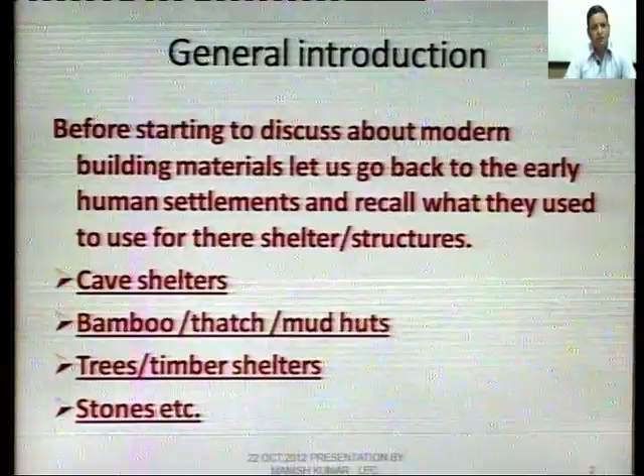So let's start. Before discussing modern building materials, let's go back to early human settlements and recall what they used for their shelters and structures. We know they used to live in caves, use bamboo and thatch for their huts, live on trees, and use stones also for their shelters.

Now think a little, and we can conclude that in those times some factors limited the use of that kind of materials. First, need — they were not in demand of high strength or long lasting structures, so they erected temporary structures since they used to move on. Second, knowledge — their knowledge was limited, so they were not able to construct huge buildings. Availability of material was also a constraint, so they used locally available materials like trees, thatch, stones, etc. And the technology available with them had very few advancements.

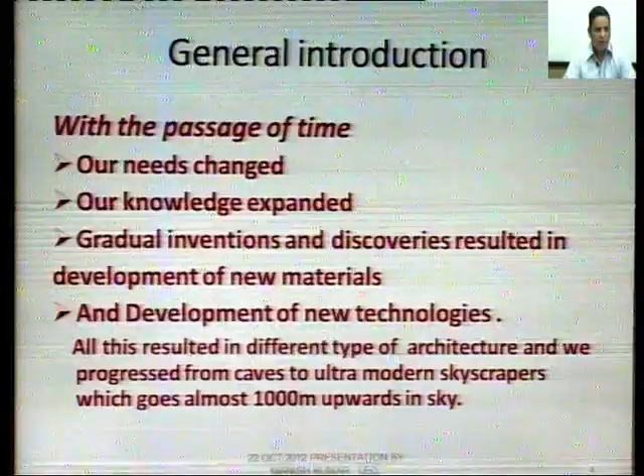With the passage of time, our needs changed, our knowledge expanded, and gradual inventions and discoveries resulted in development of new materials and new technologies. All this resulted in different types of architecture, and we progressed from caves to ultra modern skyscrapers, which go almost 1000 meters upward into the sky. And now we are planning to build on the moon and on Mars also.

So in today's lecture, we will learn about some modern building materials and some new techniques and technologies which are being used to construct ultra modern structures, buildings, skyscrapers, etc.

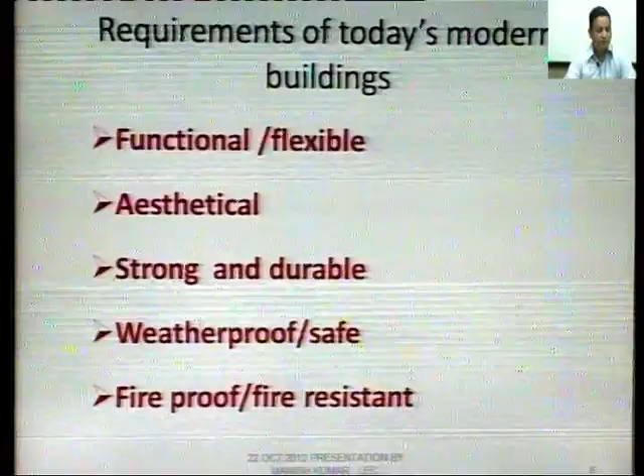First, we will discuss the requirements of modern buildings. Modern buildings should be functionally okay, flexible, aesthetically pleasing, strong and durable, weatherproof and safe, fireproof and fire resistant, earthquake resistant, economical, environment friendly, energy efficient, and if possible terrorist proof also.

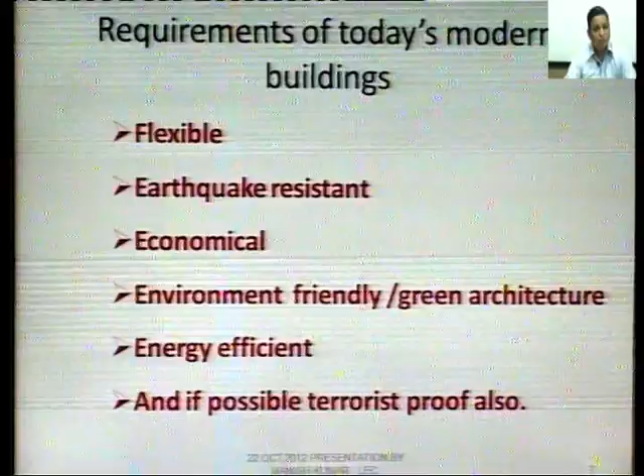First, we will start with the functional aspects. Functionality is not a problem these days, because no matter how big or small our functional requirement is, we have advanced and accurate technologies which can be successfully applied to achieve required goals in a building.

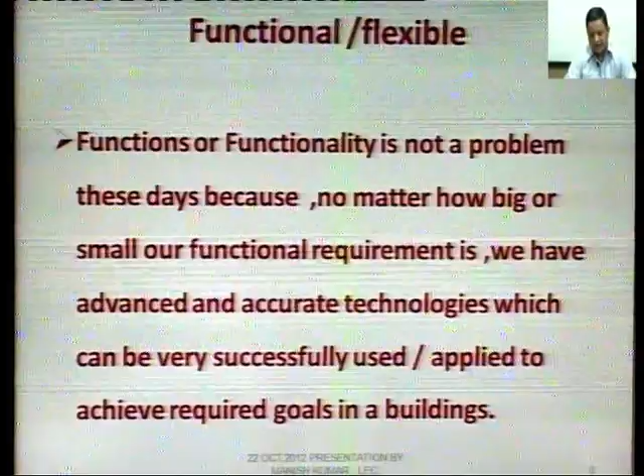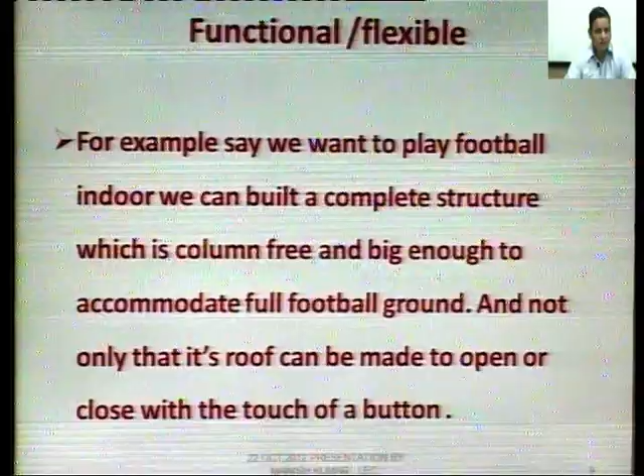For example, say we want to play football indoors — we can build a complete structure which is column free and big enough to accommodate a full football ground. And not only that, its roof can be made to open or close with the touch of a button.

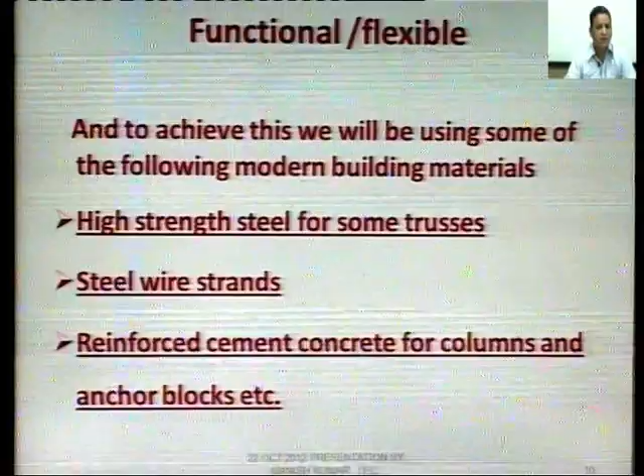To achieve this, we use some of the following modern building materials: first, high strength steel for trusses; second, high strength steel wires or strands; third, reinforced cement concrete for columns and anchorage blocks, etc.

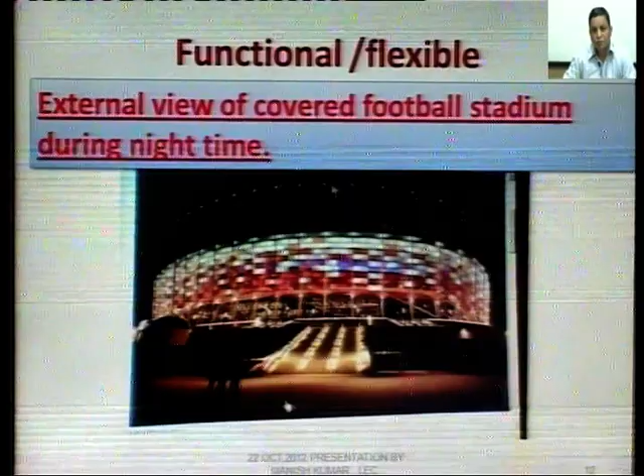Here, look at the picture. This is a view of a covered stadium whose roof is supported by huge and massive steel columns and cables. This is the external view. This is a slide of the same stadium at night, and we can see the roof supporting structure columns going high into the sky. These dots indicate the top end of the roof supporting structures.

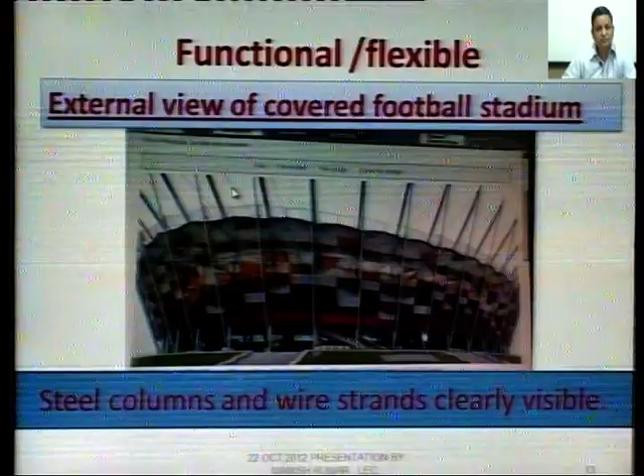This slide gives a closer view of the supporting steel columns and the cables which support the roof. This is another slide showing a covered stadium. We can see the roof is covered, and these two huge arches are supporting the roof structure.

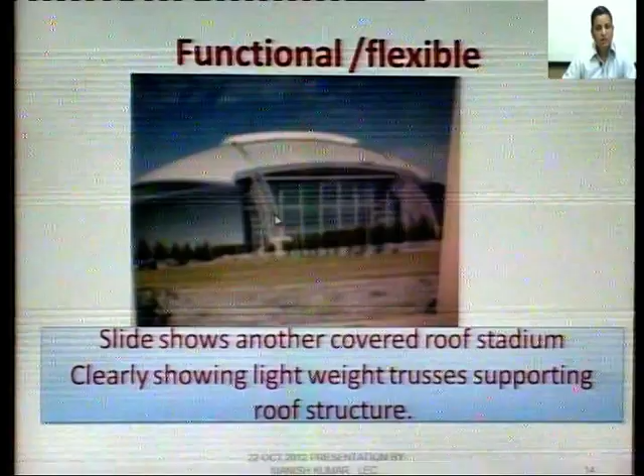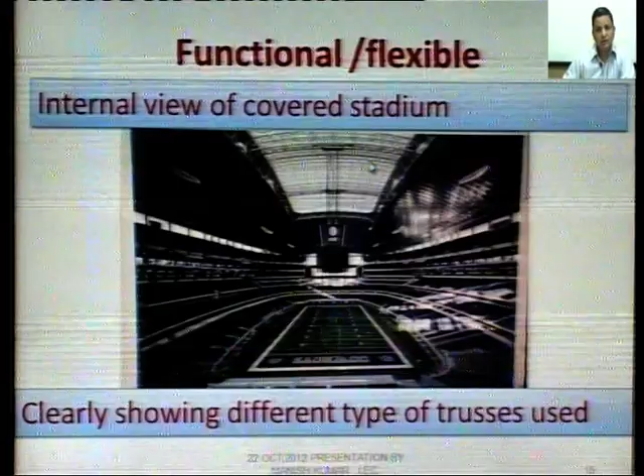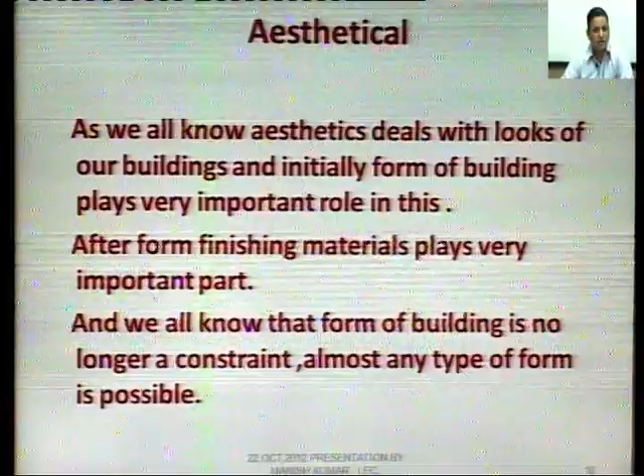The second aspect is aesthetics. Aesthetics deals with the looks of our buildings, and initially the form of the building plays a very important role. After form, finishing materials play a very important part. Form of the building is no longer a constraint — almost any type of form is possible.

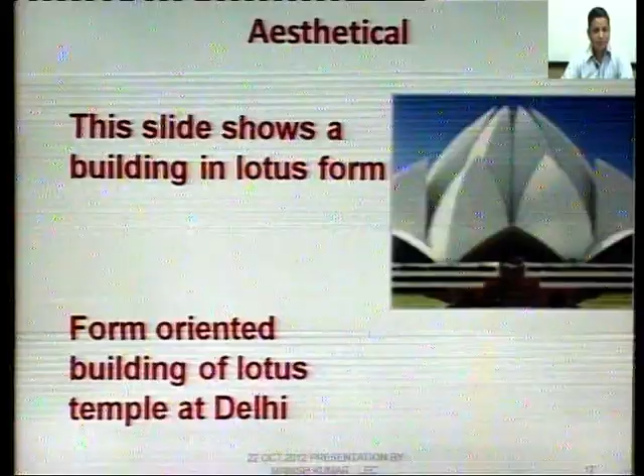This is a very good example of a form oriented building — we can see a lotus type structure. It is the very famous Lotus Temple at Delhi. This is another slide showing form oriented buildings.

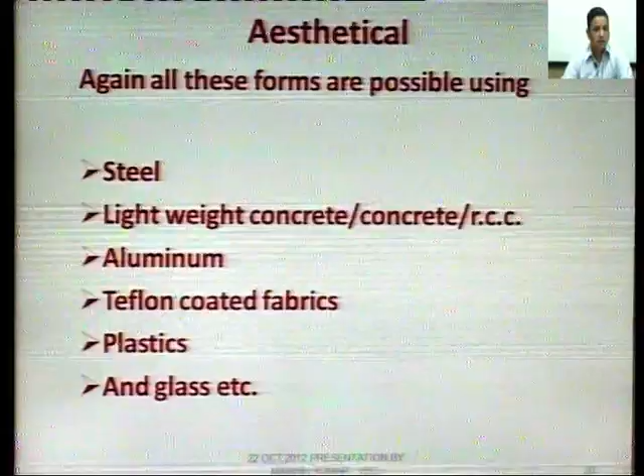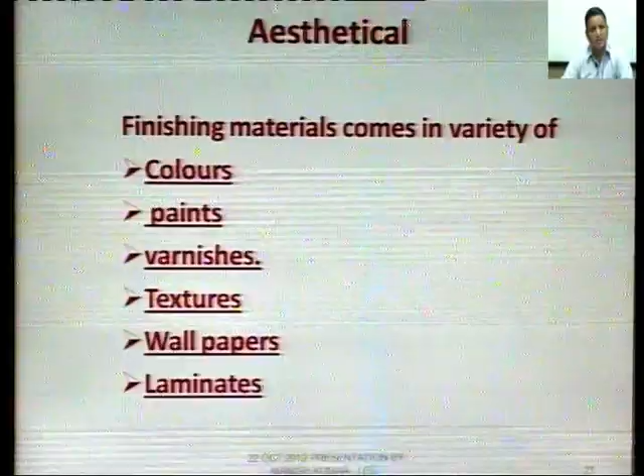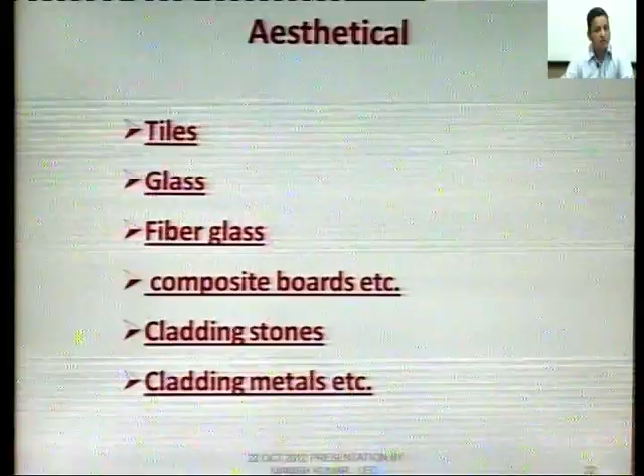Second part of the aesthetical was finishing materials. Finishing materials come in a variety of colors, paints, varnishes, textures, wallpapers, laminates, tiles, glass, fiberglass, composite boards, cladding stones, cladding metals, etc. A lot of permutation and combination of these materials can be applied to achieve the desired aesthetics.

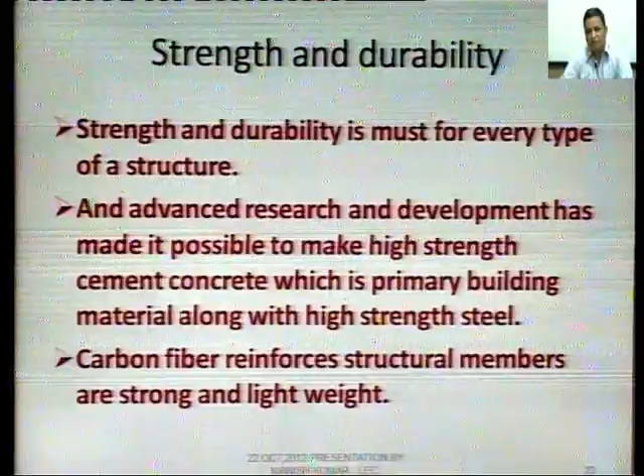The next important aspect is strength and durability. Strength and durability is a must for every type of structure, and advanced research and development has made it possible to make high strength cement concrete, which is the primary building material, along with high strength steel. Carbon fiber reinforced structural members are also stronger and lightweight.

We all know that glass is a brittle material and it breaks easily, but advanced research in this field has made it possible to manufacture glass which is strong enough even to resist bullets.

Apart from all these, admixtures are added to concrete to increase its strength. Polymers are added to mortars to enhance its binding properties. Pre-stressed concrete is also a very good example of high strength concrete, and there are two methods to do this.

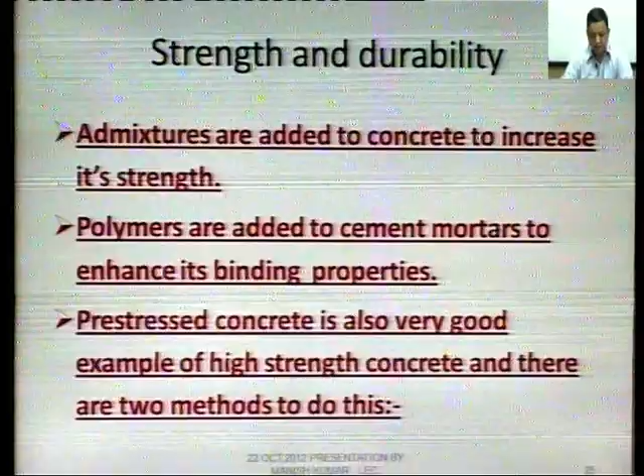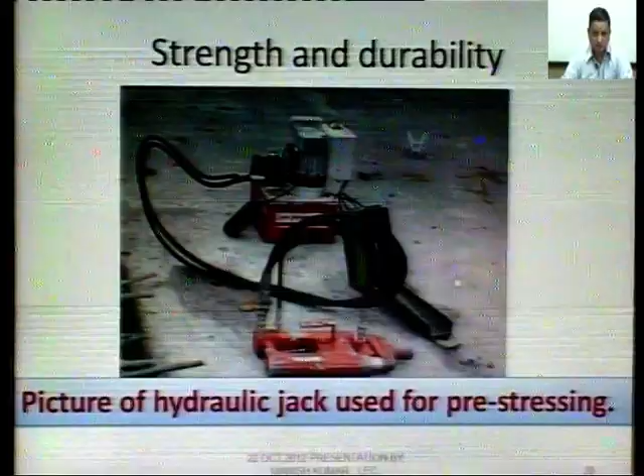This slide shows a hydraulic jack used to pre-stress steels in pre-stressing.

The first method of pre-stressing is pre-tensioning. It is a very simple method. In this method, steel is stressed before concrete is poured and allowed to set, keeping the steel in good tension. Concrete prepared by this method has much more strength and durability than ordinary reinforcement concrete.

The second method of pre-stressing is post-tensioning. In this method, steel is stressed after the concrete is poured and allowed to set, then the steel is tensioned. Concrete prepared by this method is also much stronger than ordinary reinforcement concrete.

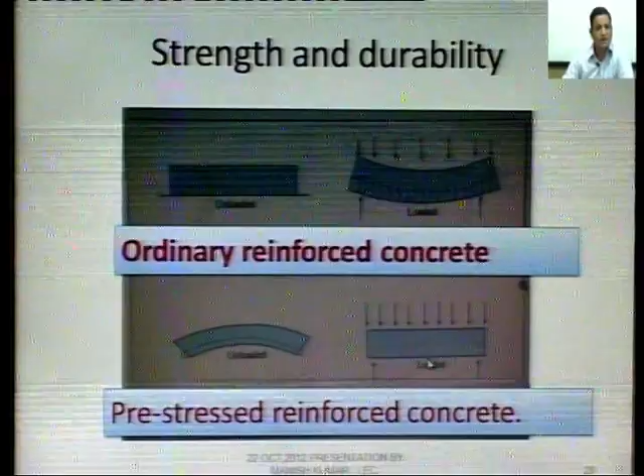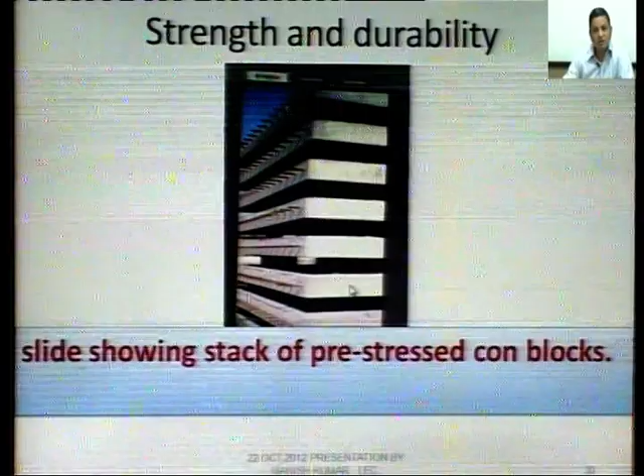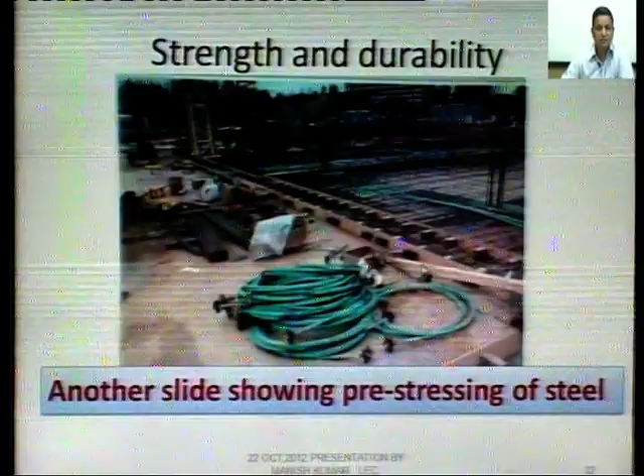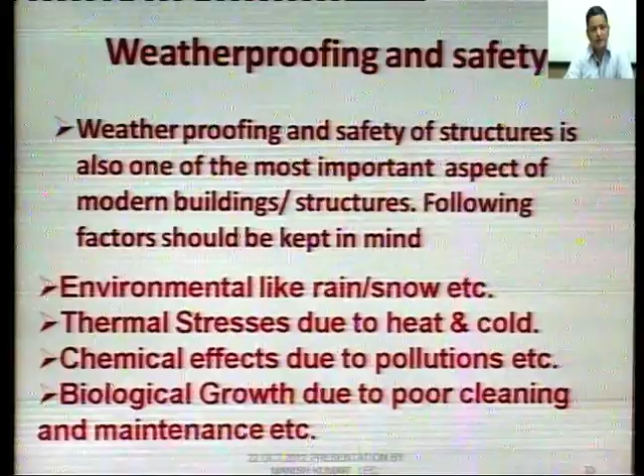And to counter all these above listed factors, we have advanced materials which can be applied and used to counter all those threats. First, anti-corrosive coatings - we can protect our structures by applying some anti-corrosive coatings. Second, adhesives and bondings - we can properly bond different structural members so that there is no leak. And if there is a leak, we have high strength repair mortars and curing compounds.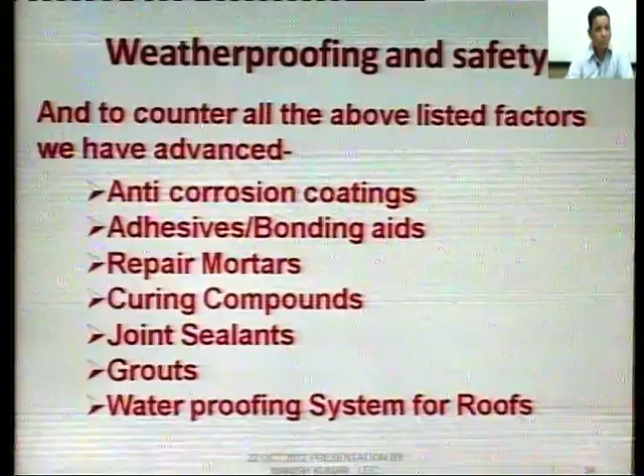We have joint sealants, we have grouts, we have waterproofing systems for roofs, and some other special materials also. Various compounds used for these are different types of epoxies, polyesters, acrylics, polysulfides, polyurethanes, and silicons, etc.

Thermal stresses due to heat and cold can be countered by good expansion and contraction joints. This is very important - our buildings expand in hot summers and contract in winters. So we must provide expansion joints in all our buildings and properly water seal them so that there is no leakage. For that we need joint sealants, grout, and there are other methods of waterproofing of joints also.

Weatherproofing and safety, expansion joints. These are provided in buildings at some regular distances.

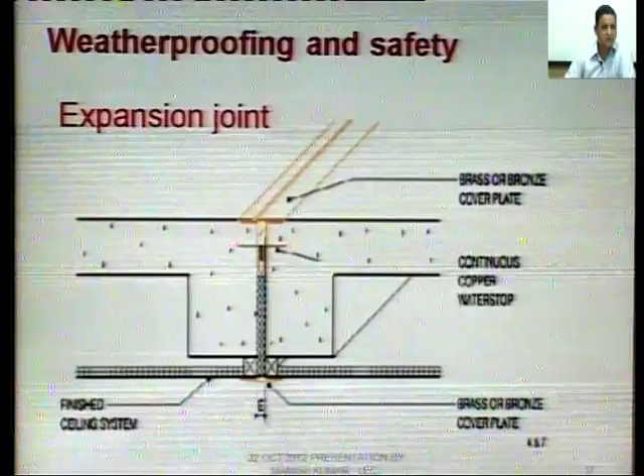This is a sketch showing two parts of the slab - this is one part of the slab, this is another part of the slab. This is the expansion gap provided between the slabs. We can see that at the top a brass or bronze cover plate is provided, and inside there is also a copper water stop. This is also this type of metal plate, and we can see that at the bottom also a brass or bronze cover plate is provided. This is a very good example of an expansion joint. This protects buildings and stops the forming of cracks.

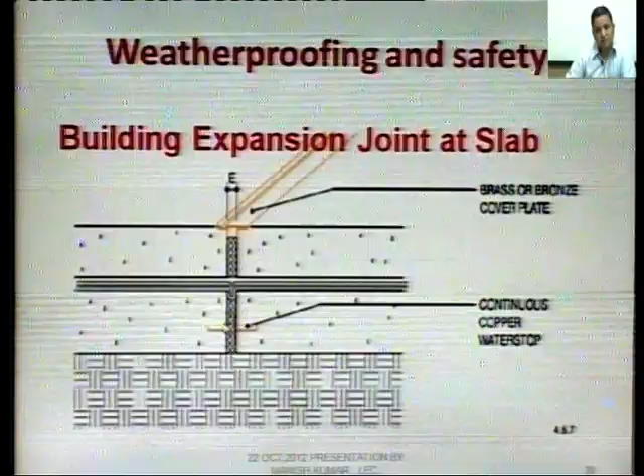Here's another example of a joint. In this joint also, at the top a brass or bronze cover plate is provided, and a continuous copper water stop is also provided here. This is also a very good expansion joint.

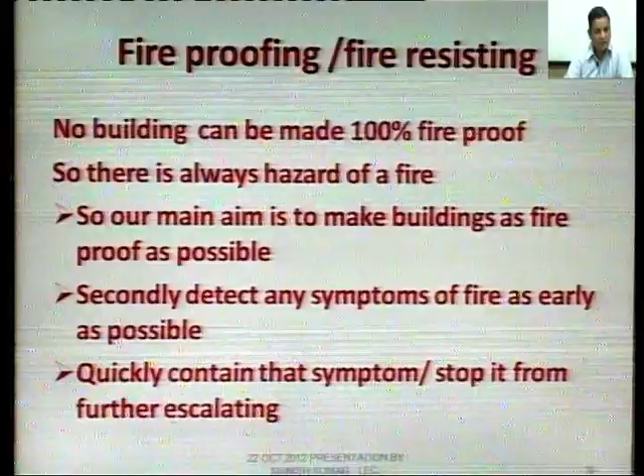Next aspect is fireproofing or fire resisting. No building can be made 100% fireproof, so there is always a hazard of fire. Our main aim is to make buildings as fireproof as possible, detect any symptoms of fire as early as possible, and quickly contain that symptom before it escalates.

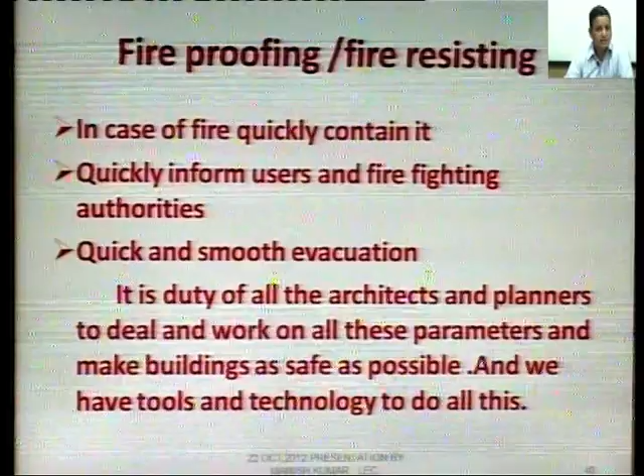In case of a fire, we need to quickly contain it, quickly inform users and firefighting authorities, and ensure quick and smooth evacuation of people occupying the building. It is the duty of all architects and planners to work on these parameters and make buildings as safe as possible, and we have tools and technology to do all these things.

First, we have fire retardant materials and finishes which can be incorporated in modern building complexes. We have fire resisting paints, fire retardant materials, fire retardant concrete, and fire retardant mortars. We can use all these materials.

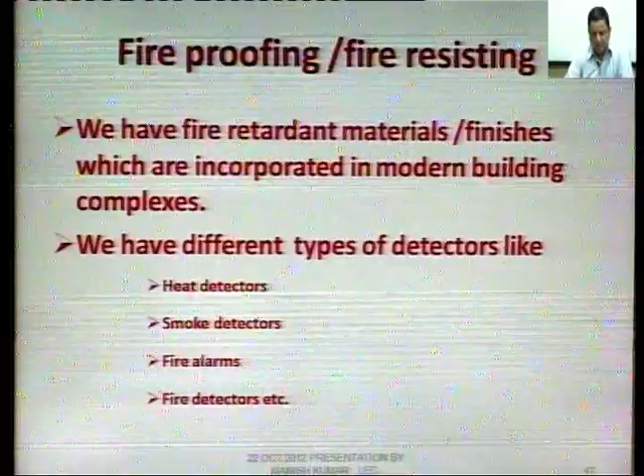Second, we have different types of detectors, like heat detectors which make a siren when there is a certain rise in temperature. Then we have smoke detectors which detect the smallest amount of smoke and give sirens. There are also fire alarms that go off automatically in case of fire, and fire detectors which detect fire and make an alarm.

And to quickly contain fire, we have automatic sprinkler systems which get activated in case of a fire. This is a very good system - it detects fires and automatically starts sprinklers which very soon extinguish the fire.

We have a network of fire hydrants within building complexes, strategically located so they can be used in case of a fire emergency. We also have a wet pipe system with continuous water at high pressure, which can be used to douse the fire whenever there is a need.

Fire alarms are networked with fire departments and paramedical services, which can come into action without wasting precious time. These alarms automatically inform fire departments and paramedical services so they can swing into action and save precious lives.

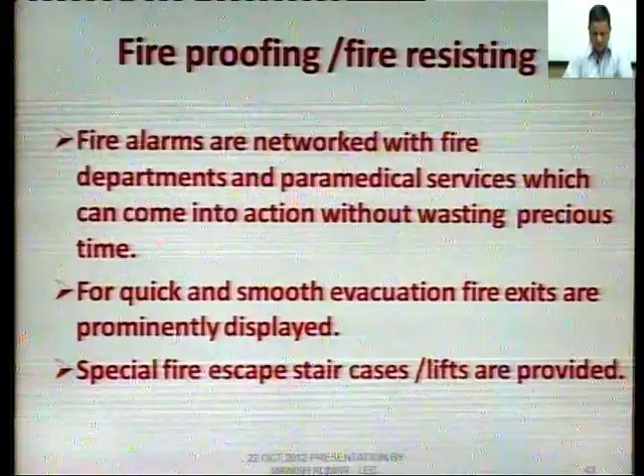For quick and smooth evacuation, fire exits are prominently displayed in buildings, and special fire escape staircases and fire escape lifts are provided, which can be used during fires or other emergencies.

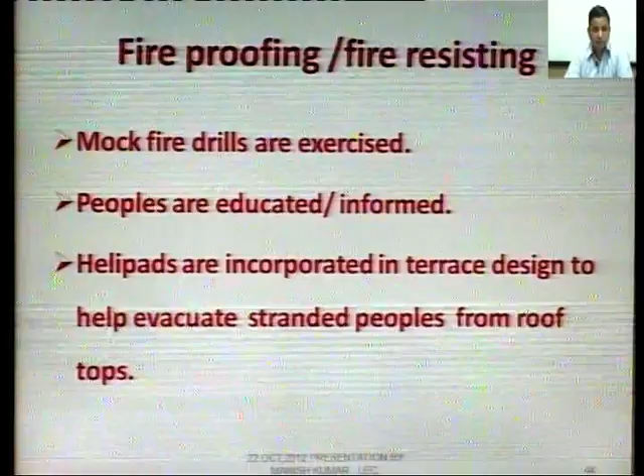Mock fire drills are also exercised. Peoples are educated and informed about fire hazards and what to do in case of a fire. Some buildings have helipads incorporated into terrace designs to help evacuate stranded people from the rooftop. In India also, we have many multi-story buildings with helipads for this purpose.

This is a 7-star hotel in Dubai. We can see in the picture here a helipad which can be used in emergencies or otherwise.

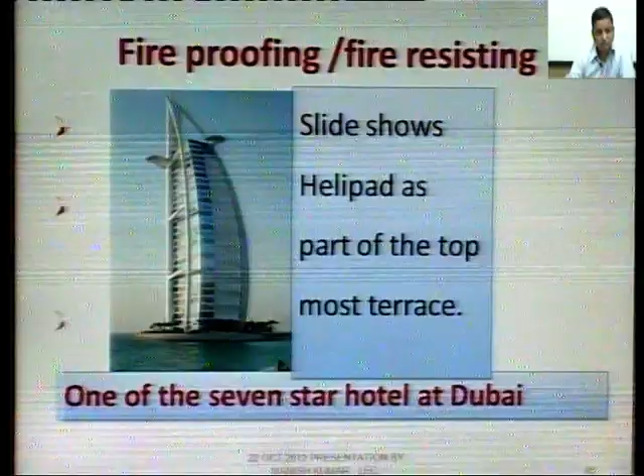Next aspect is flexibility. Modern buildings are far more flexible than old conventional buildings. It's true - column and beam designs have made it possible to freely distribute various functions in a building. Development of modular design concepts has also given us more freedom and flexibility.

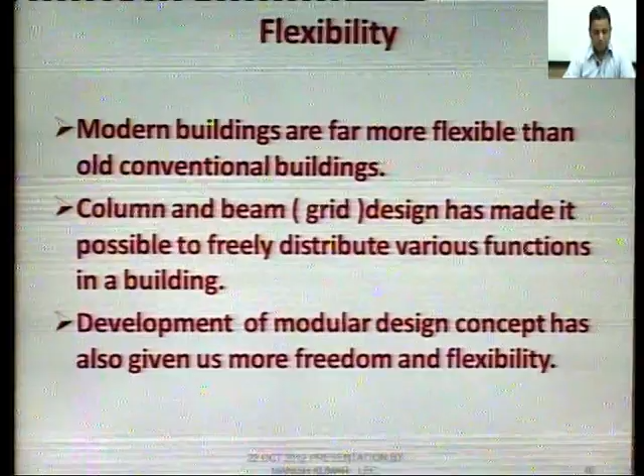We all know that in grid structure, column and beam structure, we can plan our walls freely and distribute different functions as per our needs, because of the freedom given by beam and column structures. This slide shows a huge column-free space which gives layout flexibility, usable as per our needs.

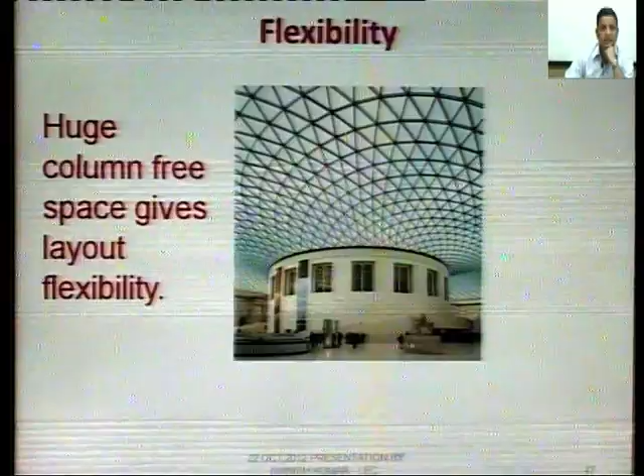This is another slide showing flexibility of form. We can see this is a very flexible, abstract form. It is very easily possible.

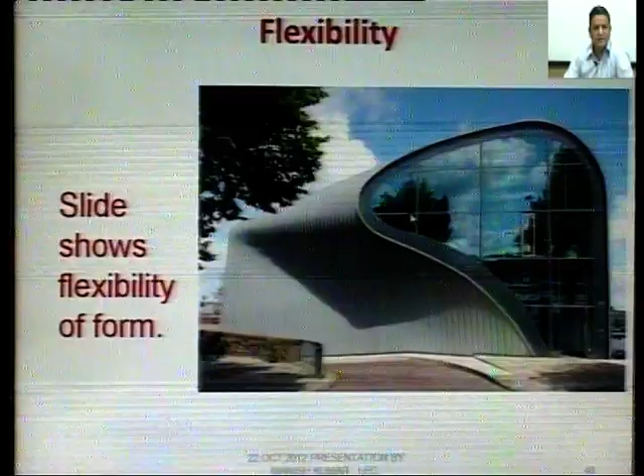Next important aspect is earthquake resistant designs. As we are going higher and higher, accommodating more and more people in a given space, it becomes our prime duty to save buildings from earthquake forces. Thank God we have advanced modern materials and techniques which are good enough to resist these types of forces.

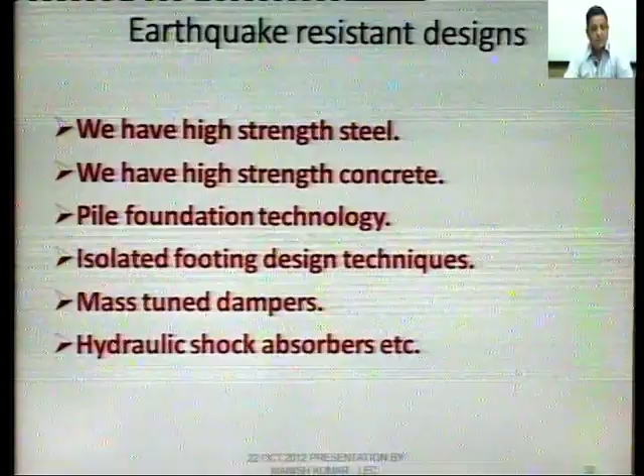For earthquake resistant designs, we have high strength steels, high strength concrete, pile foundations, isolated footing design techniques, mass tuned dampers, and hydraulic shock absorbers. All these help in protecting the building during earthquakes.

This is a very famous building, Taipei 101. It has used mass-tuned dynamic dampers to counter the movement of the building during earthquakes. This is a very tall building, as we can see.

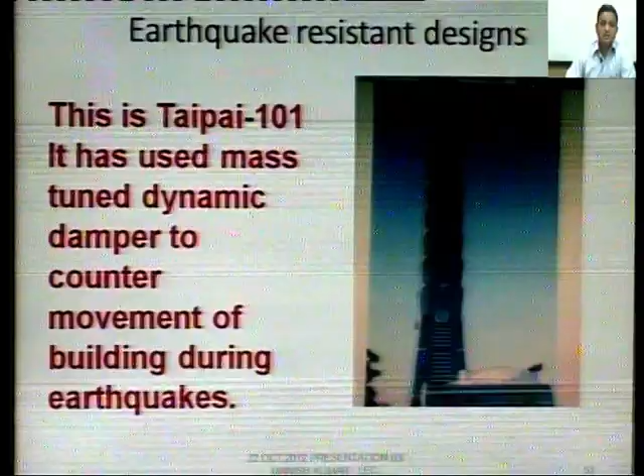This slide clearly shows the mass-tuned dynamic damper - a very heavy, huge metal ball which is near the top end of the building, and during earthquakes it protects the building from swaying.

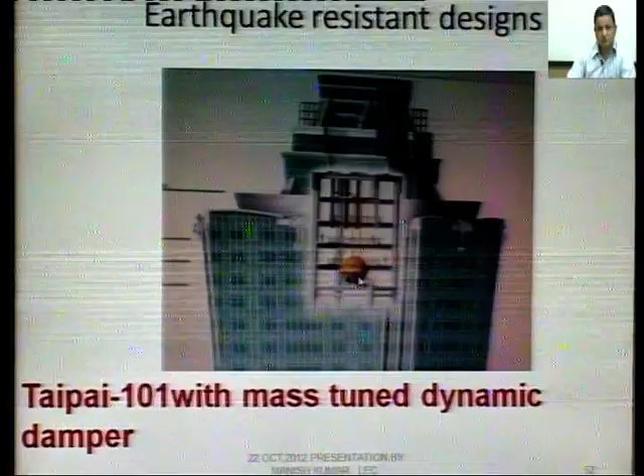This sketch showing isolated footing designs. Here are two examples. In the first, this is an ordinary foundation and this is a supporting structure. In the second, we have isolation members where we have isolated our building from the foundations using some sort of separators.

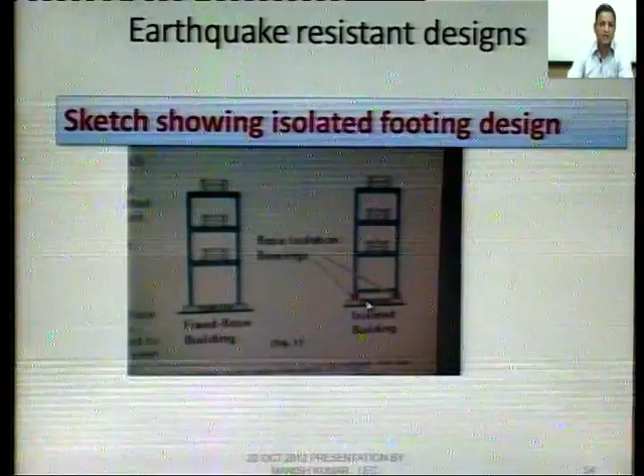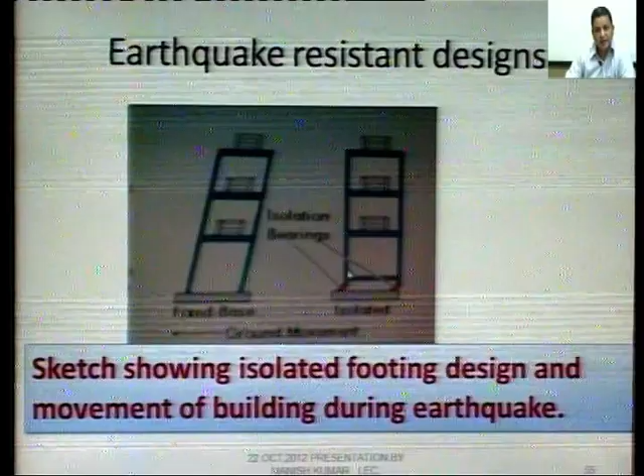This slide clearly shows what happens in an earthquake. Say there is a movement of earth in this direction, so our building will move in this direction - we can clearly see this in the ordinary foundation design. But here, where we have used base isolators, we can clearly see that our building remains straight and the shock is absorbed by these isolators.

This is a closer view of the base isolators. These are lead plugs, these are rubbers, these are supporting plates 1 and 2. This is a detailed sketch of base isolators.

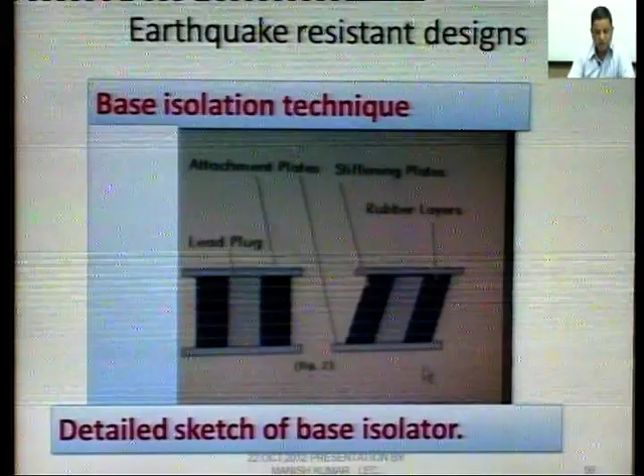This is another example of a base isolation system. It separates superstructure and substructure. Here we can see this is a concrete substructure, this is a steel superstructure, and it is separated by these springs. During an earthquake, these springs will balance the movement, balance the earthquake forces, and absorb the earthquake shocks.

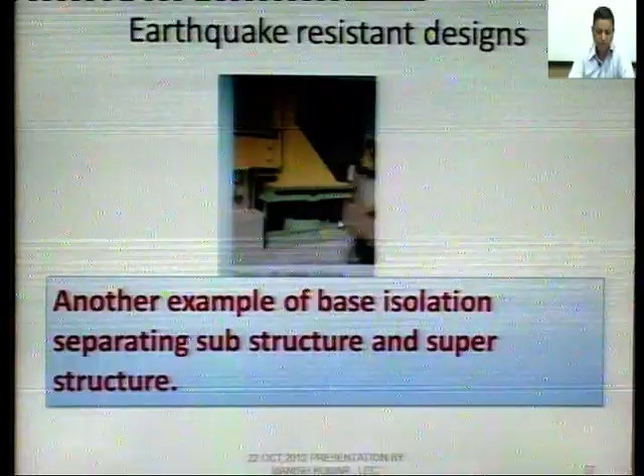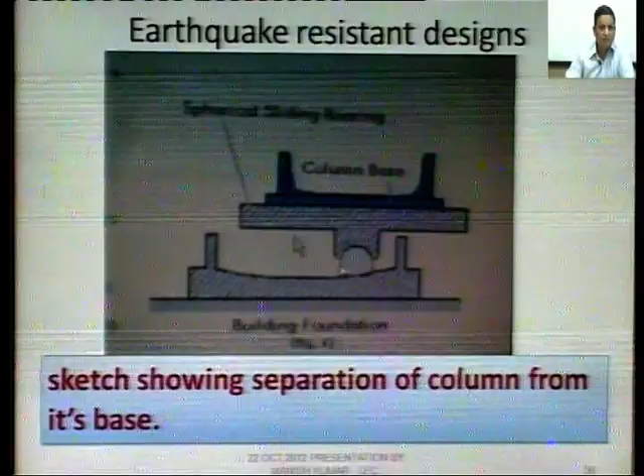This is another sketch showing separation of columns from its base. Here it is a very good example. We can see this is a part of the foundation and footing of a column. This member here supports the base of the column, and this is a round metal ball. During an earthquake, the lower part of the ground can move right or left, and the column will remain stable, the building will remain straight, and there will be a slight horizontal and vertical movement in this ball.

So this is all about earthquakes. We have different more techniques also that will be covered in later chapters.

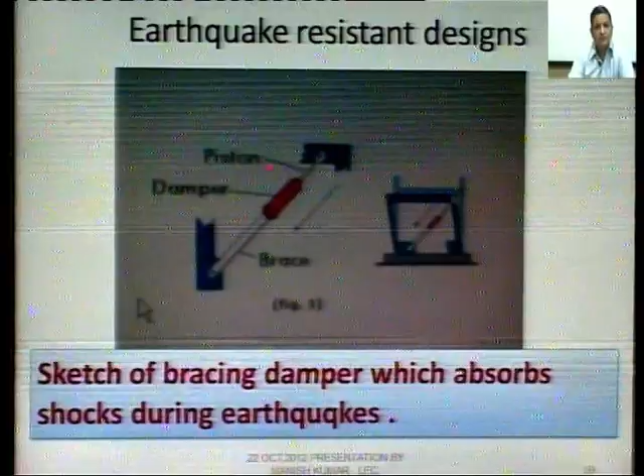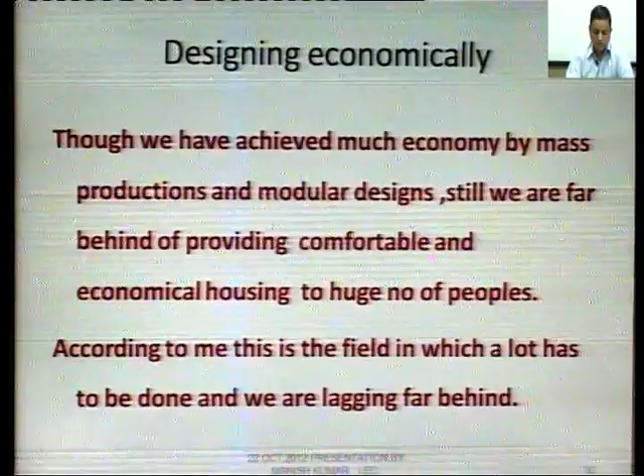Next is designing economically. This is also a very important aspect. Though we have achieved much economy by mass production and modular designs, still we are far behind providing comfortable and economical housing to a huge number of people. According to me, this is a field in which a lot has to be done, and we are lagging far behind. Basically, we are not able to solve this problem, and still we have thousands of people who are homeless. So this needs to be looked at carefully.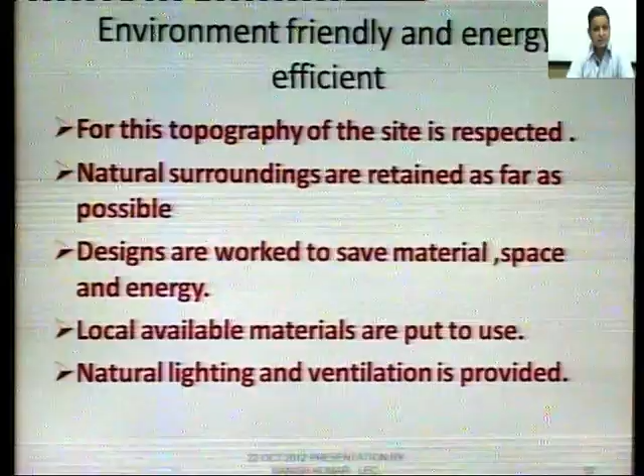Designs should be worked out to save materials, space and energy. Local available materials should be put to use. Natural lighting and ventilation to the building should be provided.

In hot climate, double glazed reflective glass is used to reflect heat of the sun and allow light to come in. Next, heat energy of the sun is used to generate electricity using photovoltaic cells. We can generate a lot of electricity by this method. And in cold climates, heat of the sun is trapped and light is also allowed to come in using fixed glazing facades.

This is a very good example of a fixed glazing facade. This will allow the building to heat, this will trap heat of the sun. This is a very good design for cold climate countries.

Next, some buildings are fitted with wind turbines to generate wind electricity. Recently, Taiwan and Bahrain have developed this technique and they are working on it. There are some buildings which incorporate wind turbines into the design of the buildings.

Next is rainwater harvesting incorporated into building designs. We can collect all the rainwater and use it to recharge the groundwater, or simply use the water for some landscaping purposes. Next, waste is to be separated, treated and then suitably disposed. This will also help to save the environment.

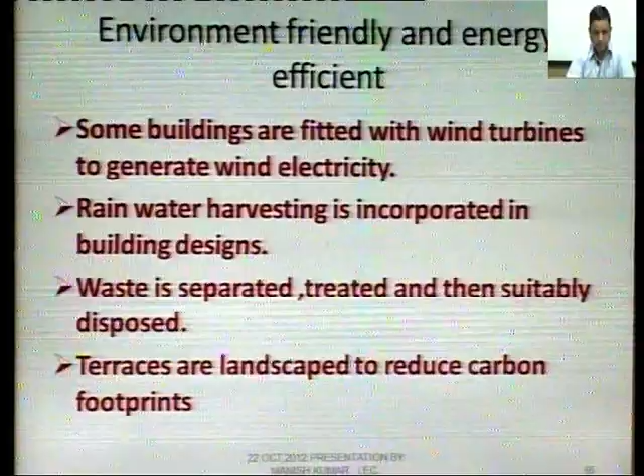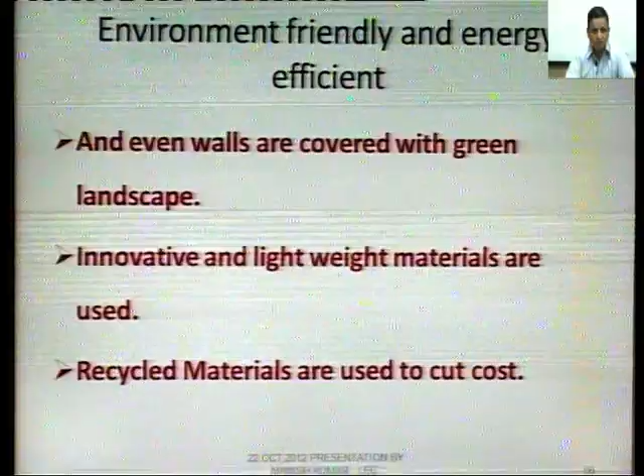Next, terraces can be landscaped to reduce carbon footprints, and even walls can be covered with green landscape, which many architects are doing. Innovative and lightweight materials can be used for buildings. Recycled materials can also be used to cut costs.

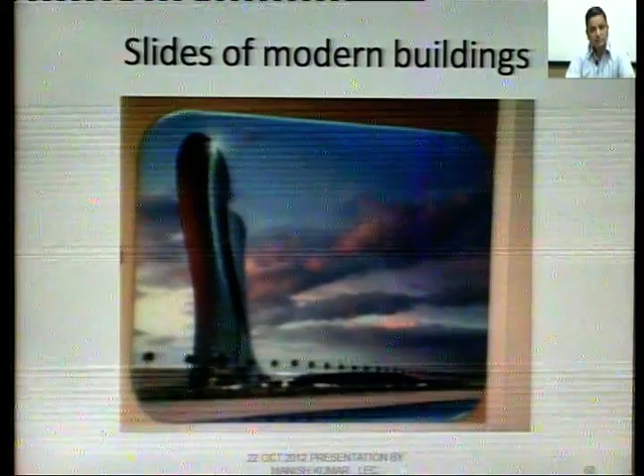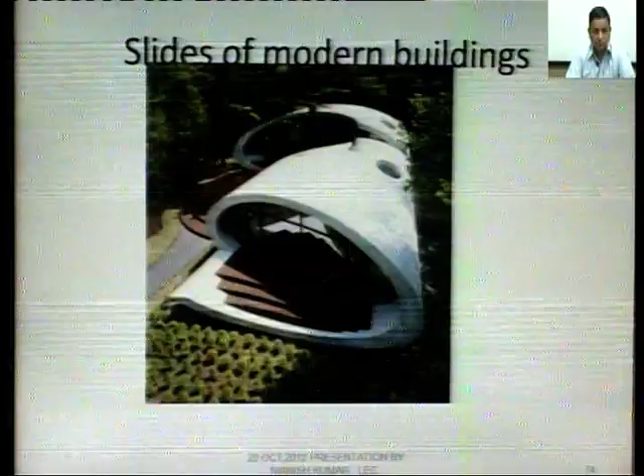Hereby we can conclude that modern materials and technologies have an upper edge over the old conventional materials that had been in use for decades or maybe centuries. Before finishing, let's recall what we have learnt. What are the modern materials?